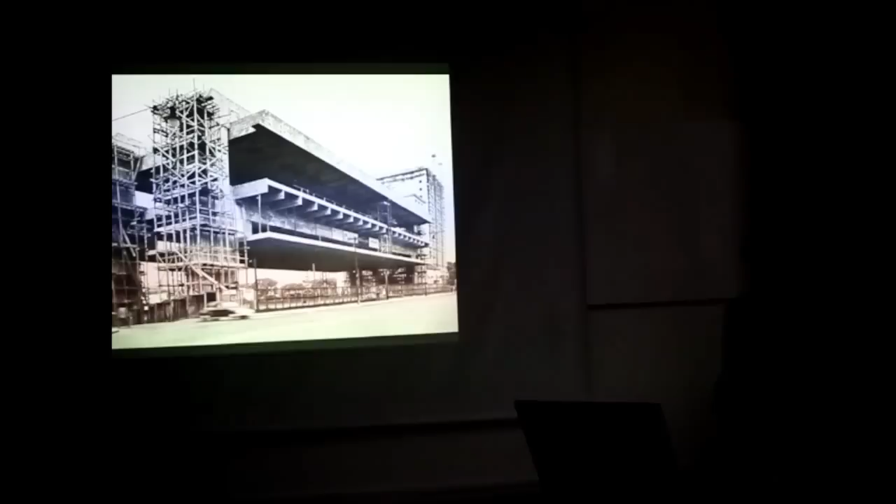And maybe one of the reference points - we think a lot about structure and how structure and space are absolutely interconnected. In a sense, this image is very much to do with defying gravity, with having a sense of mass and at the same time having a sense of defying mass.

Just to talk about themes or qualities we look for in the work we try to make: we don't see much difference between past and present in terms of places and spaces and qualities that move you. We're interested in that sense of mass being borne down or held up, and that human beings enjoy moving in spaces where you feel you're moving within the play of the forces of gravity. This is an undercroft of two bridges that meet in Toulouse, a beautiful conjunction of elements.

One of the projects I'm showing is our project in Toulouse, the Jacobin cloister, where we managed to capture this moment of a child standing in the sunlight, in the spotlight. It was memorable for us in terms of registering the climate and the light, and thinking about how, when you visit a place like this, one can make space through a series of layers — of garden, of cloister, of wall, of window, of volume, of glass, of tempering climate — rather than containing space in an abrupt way.

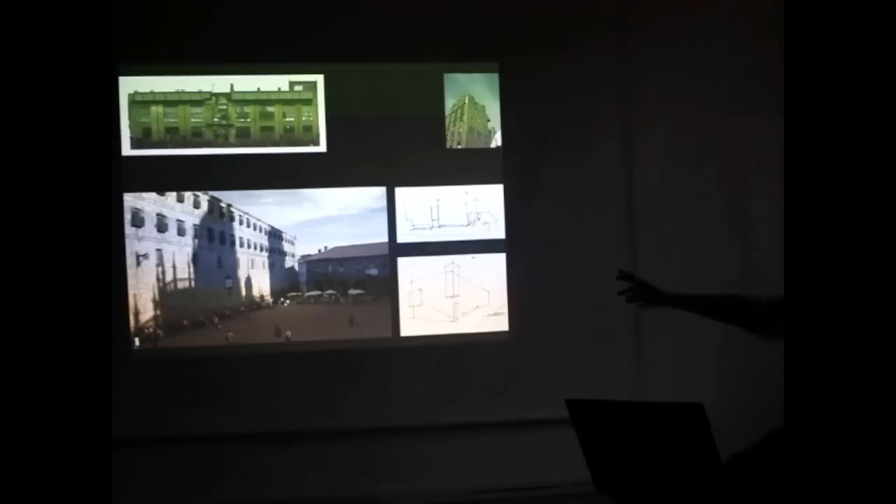One of the things you asked us to talk about was something we never managed to achieve. This is the same wall in Santiago de Compostela, with a big bench and the reflection of the cathedral on its surface — this idea of making a building that would be a secondary element to something more primary and more important than you.

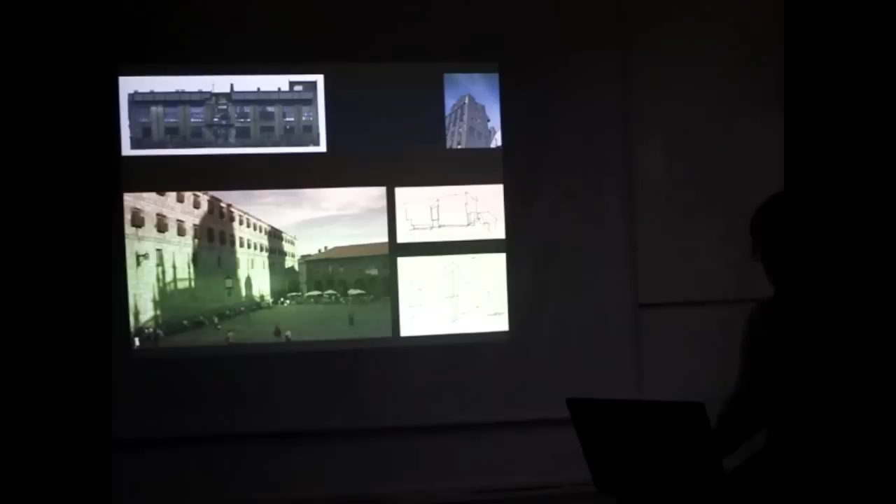When we made the Mackintosh competition entry, this was our aspiration — to make something opposite the Mackintosh building which would be almost nothing, a wall that would reflect in the sunlight, reflecting the form of the Mackintosh building, and would make a seat from which people could view it. We thought that was a beautiful idea, but we made a complete mess and didn't develop it. So that's one of the things you asked — are there things you've never managed to make? That's one. But we're really interested in making something secondary to something already there, something primary to your own project.

This comes back to Oskar Kokoschka, painting from the top floor of a building right beside the Berlin Wall, looking down on a city he hasn't seen since the '20s and is shocked when he returns. He's commissioned to make a painting just after the wall has gone up, and is so shocked to see the scarred city. It comes back to this idea of city and architecture — when you see cities or buildings destroyed, you realize that architecture and buildings and cities hold culture.

When buildings are destroyed, a component of culture is destroyed. This is the city that has made us, or made our practice. We've spent many years working in Dublin, stitching and repairing blocks and working in back lanes, and I suppose without realizing it, following the proposition of Jensen Skodvin, thinking about addition rather than subtraction. This way of building up a practice, where you're literally always repairing something that's already there, has affected the way that we look at ways of making new projects.

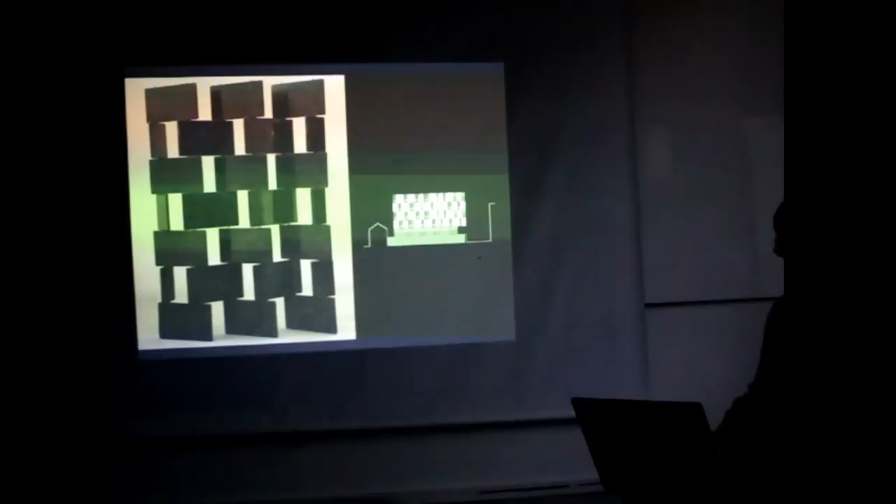Our reference point for this was the Eileen Gray lacquered screen. What we love about that screen is that it's movable. It has weight, but we've always wanted to make a wall which would have that sense of maybe being able to move, even though it might not move, almost dematerializing mass. This was a collage study we started this project with, for the building in Dublin.

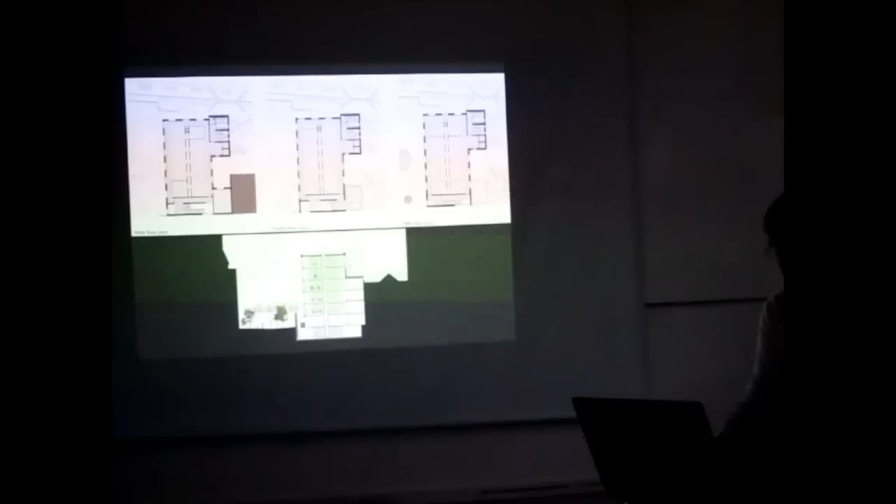The other building we went to see when making this project was this bank building in Stockholm by Celsing. We were really shocked by the enormous strength of this black piece of mountain, which seemed to find itself in the center of Stockholm. It starts off being very rough and becomes more and more refined, absolutely beautifully detailed, and we felt it was like a piece of geology right in the center of the city. We were trying to make a wall which would have that kind of mass.

We made an office building where the circulation is on the edge and people work in the middle, so there was an idea that the city was present, and that the civil servants and the city would always be in contact. We made this cloistered space with the rhythm of window, solid, framing the view of the city, making a vertical weave of stone and glass, like a privacy screen overlooking the cemetery. The recessed windows open and the projecting windows are fixed, so your relationship with the wall and the city changes as you move around the building.

So this project was to do with paying homage to a secret, important place in Dublin, and also making a public building which would have a sense of presence and of mass.

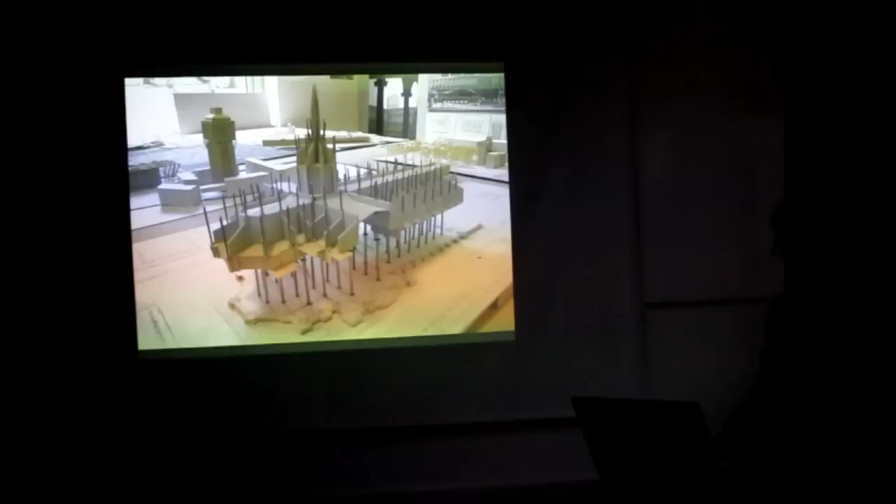We found on the roof of the Duomo a kind of abstracted landscape - like this man-made stone mountain whooshed up in the air. This model was made by Mendrisio students, and we really loved the way it was made, because it somehow described that sense of a man-made landscape floating above the life of the city. Going back to the Sverre Fehn roof and the limestone landscape of the west of Ireland, what we found in Milan was the fantastic floor of the city, and that had a real potency in terms of the way that we thought.

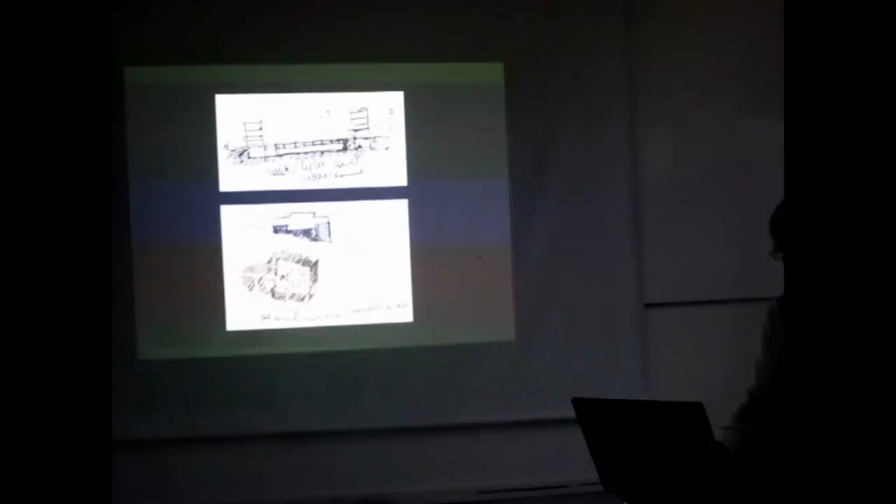And it felt like quite a hard city, quite defensive and hard to penetrate, not open and easy like so many other Italian cities. But yet when you went inside, you found this other secret world of courtyards and aviaries and wonderful delights. And our project was to build 60,000 square meters of building.

But half of it was supposed to be below ground, and we really weren't sure how you could possibly put 30,000 square meters of building below ground.

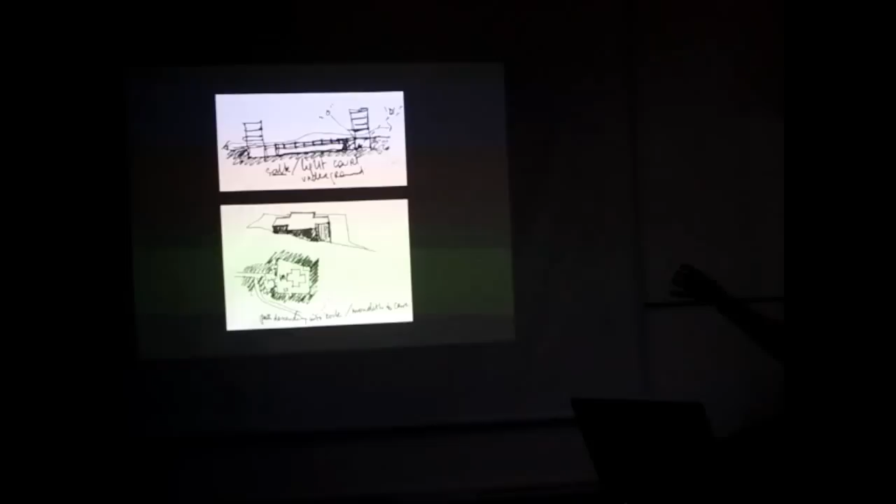And we looked at Lalibela, these wonderful underground churches in Ethiopia, where they're carved into the ground, and there's these fantastic ritualistic routes to get to these buried spaces. But of course we also looked at Kahn and at Salk and how he made spaces below and above ground.

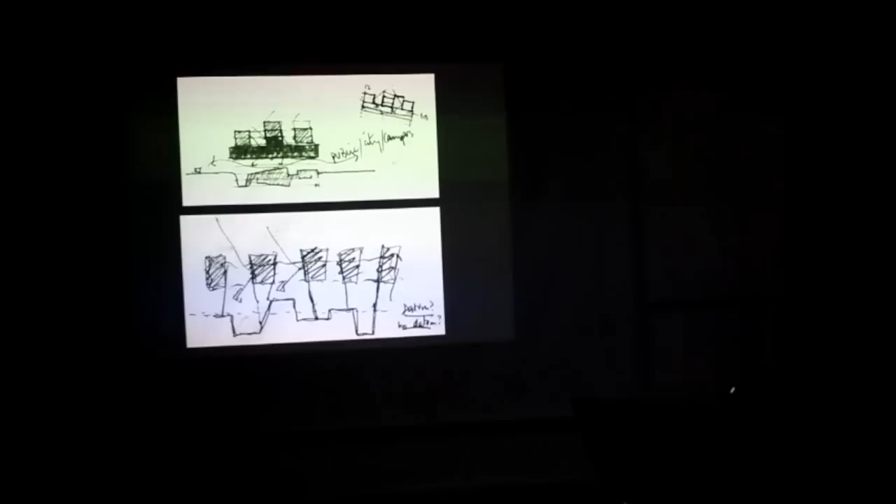And when you talk about key moments in your list of things to think about, this was a key moment for us. You know, when you find sometimes that you've got something that you can make, that you've got a starting point, and the bottom sketch for us was the starting point.

That we could make this university by thinking, first of all, that we would eliminate this idea of boundary between below and above ground, that we would just eliminate this idea of datum, and that we would make two worlds.

One would be the carved ground of the city, which would allow the university to allow the city to enter into the world of the university, and the other would be almost like inhabited soffit louvers, that we would make this skyscape or this roofscape through which light could come.

And we were literally thinking like that because this was huge. We hadn't a clue what to do. It was more than 10 times bigger than anything we'd ever done before, and we had to do it in 3 months or something. So you hit the ground kind of running.

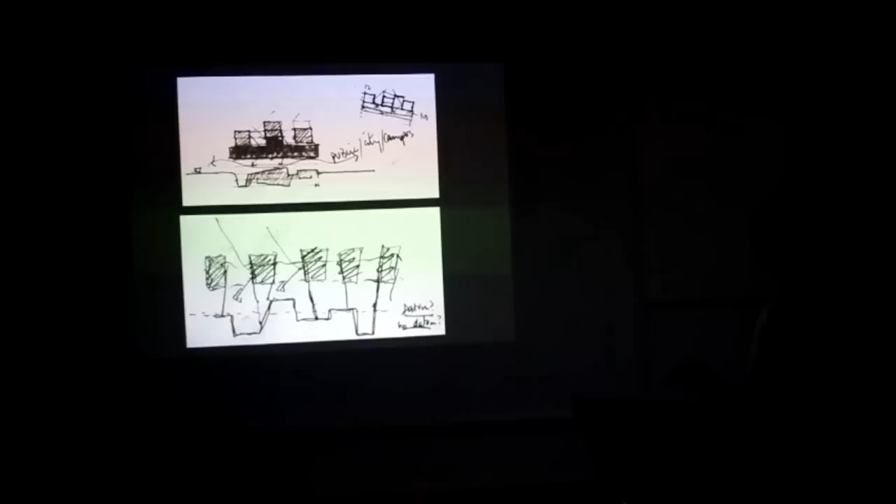And so we thought about carved landscape, and we thought about a light filter which would allow the offices of the professors to exist, the conference facilities below ground, and that somehow by holding these two worlds apart, the life of the city would enter into the life of the university.

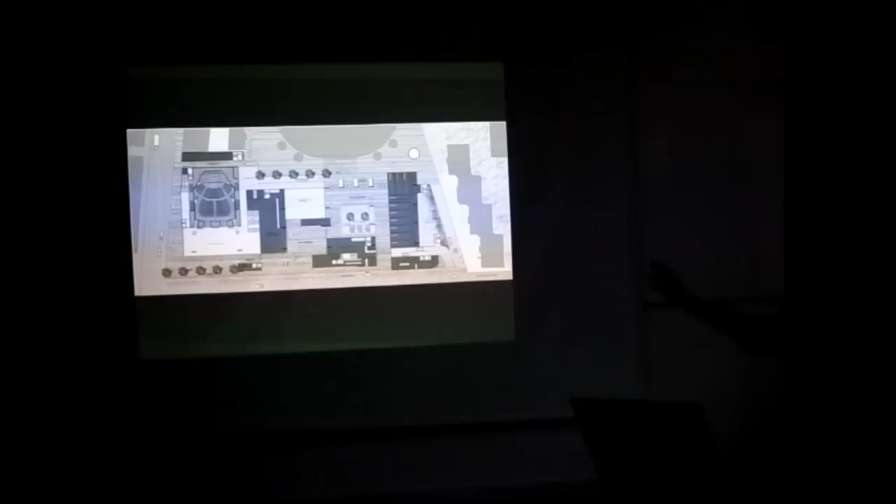I'm not going to go through it in detail, but just to say that the stone floor of Milano is taken through the building to try to bring the city through into the project, and these are our very early models of really struggling, trying to see how we could convert this idea into a project.

This thing of trying to find a scale or a rhythm. And it goes back to Lina Bo Bardi and Vilanova Artigas, this work which we actually discovered just before we were invited to do this competition.

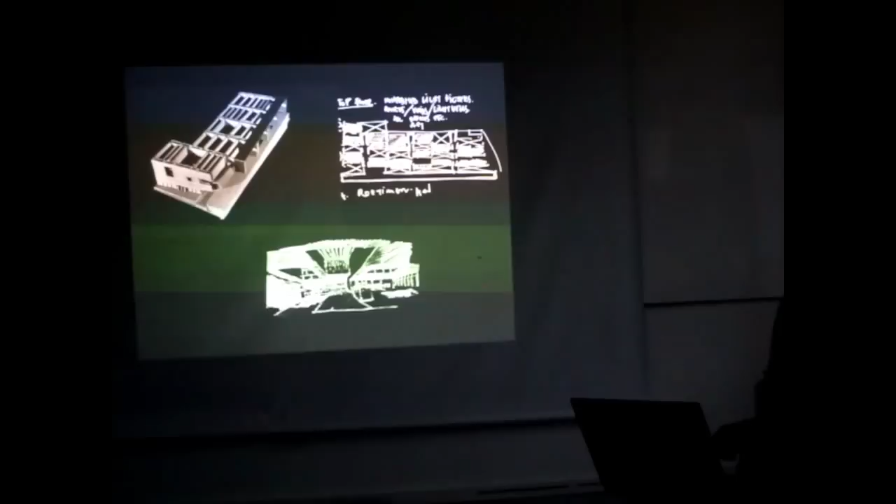And there's an infrastructural component in that work which really liberated us. So we thought about this not as a building but a piece of urban infrastructure, almost like a piece of engineering that one could inhabit. And the idea of holding these two worlds apart, being able to manipulate the soffit of one and the roof of the other, meant we would make this rich world between the two.

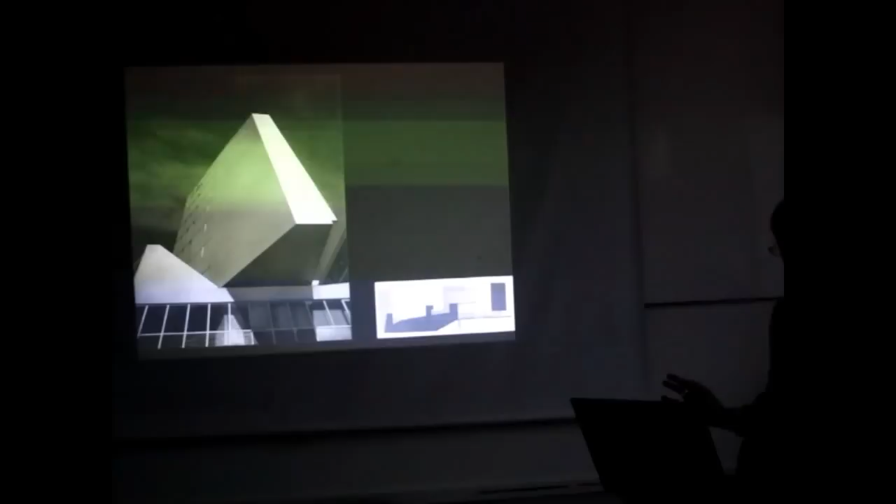When it came to thinking about what kind of building we would make in Milano, we had the highly rational tradition of Pagano and Muzio already on the Bocconi site, and we were torn between that and the more expressive elemental work of Moretti. And nearby on Corso Italia was this project, which really gave us the nerve.

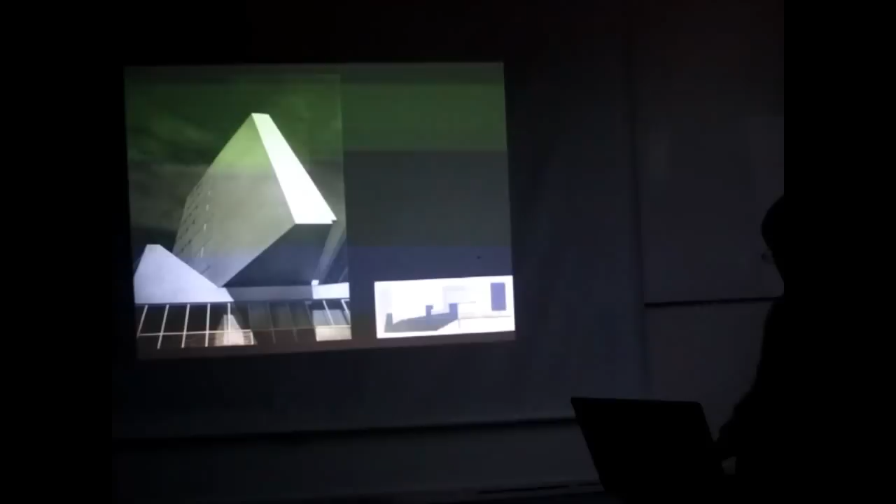And to the bottom right is a very crude collage of ours where we were trying to make the section into the expression of the project.

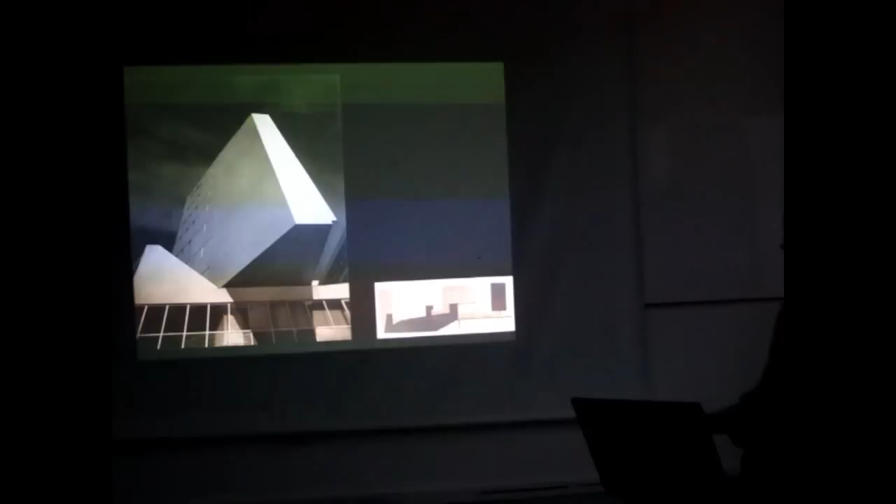And this came after a very long struggle of trying to see whether we should cloak this section of the auditorium, stitching it up into the office space, or whether we should let the project out of the box in a sense. And we let it out of the box.

I suppose we took the idea of the auditorium as the anchor for the project, and thought about it as erupting out of the ground of the city and drawing the life of the city down into the depths of the ground.

And we also thought about this auditorium stitching up into the world of the professors to make these periscopes which would light this large conference space for 1,000 people.

And the structure, which is the infrastructure, is actually the primary circulation spaces, where we have the corridors at a frequency of 25 meters, and they support beams which allow us to hang the offices.

And we had won the competition maybe about 2 weeks, and the client said, "What kind of stone do you want to use?" And we thought, "Oh my God, we haven't a clue." But we did see this lovely stone on Via Brera, and they said, "But that's really ordinary, cheap stone."

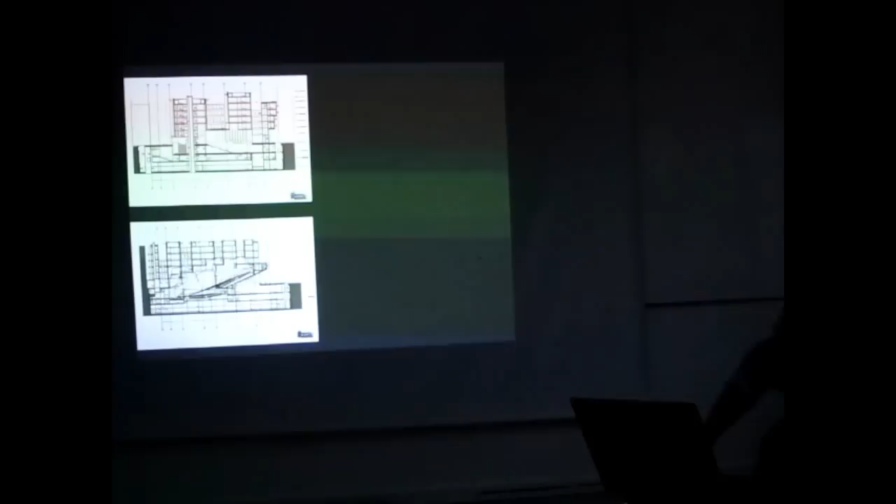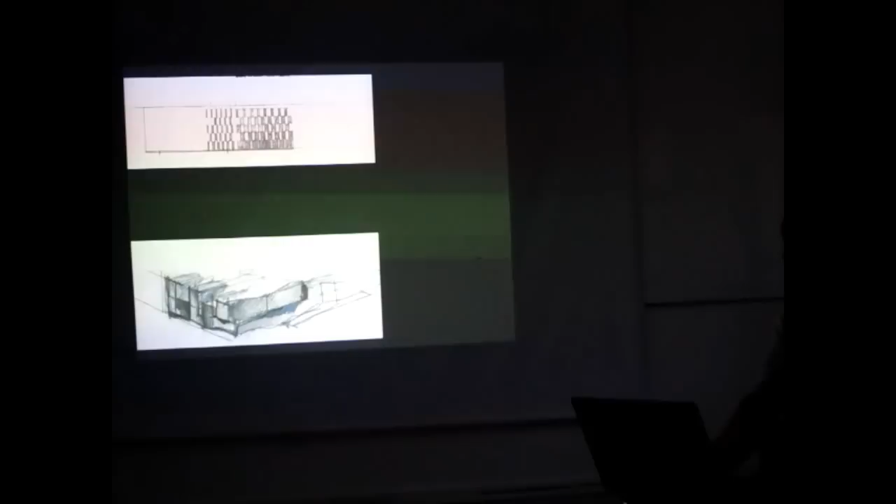And all the time moving between sketches and working drawings. The bottom sketch is about trying to get the sense of Milano, of the hard exterior, and the upper sketch was the idea of trying to make a much lighter, open interior, so that we would keep the contrast between the world of the city and the world of the interior courtyards. And the way that Ceppo is used in Milano is the way that we used it on this building.

Where it's fixed directly to the concrete, and so the joints are tiny, and it has this monolithic quality. And Yvonne called the stone geological concrete, because it feels like concrete. And actually a lot of people, when it was opened first, thought it was made of concrete. And it was a fantastic material to use.

And I suppose, again, the making of architecture, we often talk about it being a combination of precise judgments and random judgments. Sometimes you're asked very quickly to make a decision, and maybe in the way that Eliot talks about the poet needing to be a medium for poetry, architects need to develop our senses, so that when we have to make decisions, our senses are finely tuned and we can make the right judgments.

Approaching Bocconi from one side, we're always amazed that it's almost not there. It's like a kind of mirage. And then when you approach it from the other side, it for sure is there, and makes this corner and represents the presence of Bocconi University to the city.

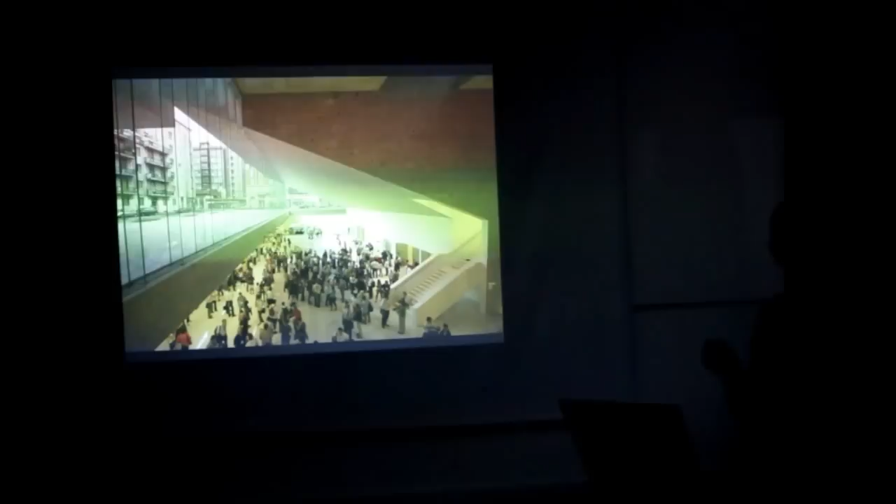And I suppose in terms of this thing of structure and space and architecture, that sense of which is ancient, of that sense as in the bridges in Toulouse, you get a sense of timelessness when you're walking under certain structures, where you feel the structure, you feel a certain connection with the world and with the earth. That relationship of structure and architecture is so primal, and there's a kind of primal component and potential in that connection between structure and space.

And again, this is an obvious reference to Lina Bo Bardi, of weight being borne up and suspended above you, and the cutting into the ground to make large-scale staircases, or the hanging of staircases in space, which is the professor's staircase, which has a different idea, and then the different moods of buildings, which is always a pleasure to watch, where it's being used as a place of celebration and a piece of social infrastructure, or where it's a place to stand alone.

One of the things we found about this strategic way of thinking was that one of the surprises was the diagonal sense.

I was just looking at the fantastic exhibition of photographs you have today, and how wonderful Katsura is, where so much has to do with the diagonal. We found this fantastic discovery of diagonal spaces in section, because the spaces aren't composed—they're the result of a strategic way of thinking, and also how light can be drawn down deep, 5 meters below ground and 9 meters below ground.

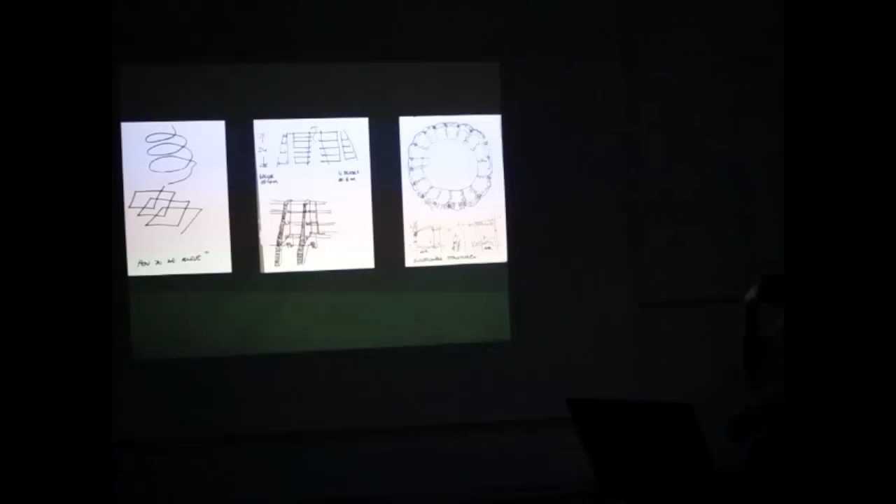Yvonne was making sketches of the buttresses in Toulouse, and we were trying to think, well, could we make a building out of buttresses?

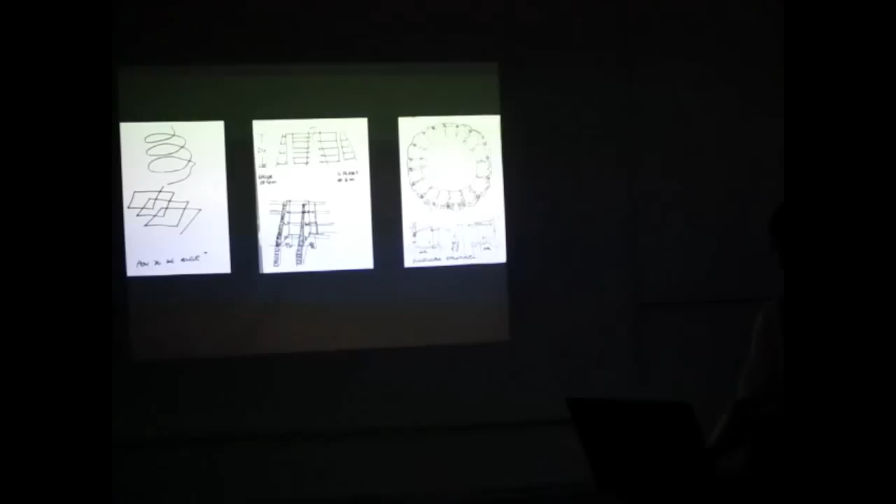I really thought she'd lost it when she started drawing the sunflowers, which were all over the place between Carcassonne and Toulouse. Sometimes you think your partner is maybe not such a great partner, but when she starts going on about sunflowers, I just think, oh God, this is going to be tough. But anyway, that's where it started.

We started with this idea, top left, of making something really solid because it's so hot, and the clients kept saying, we want a building that's cool, we can't work, we're economists, and we have to think. One of the projects we were looking at was Castel del Monte, a fantastic building in Puglia, and just making a solid wall.

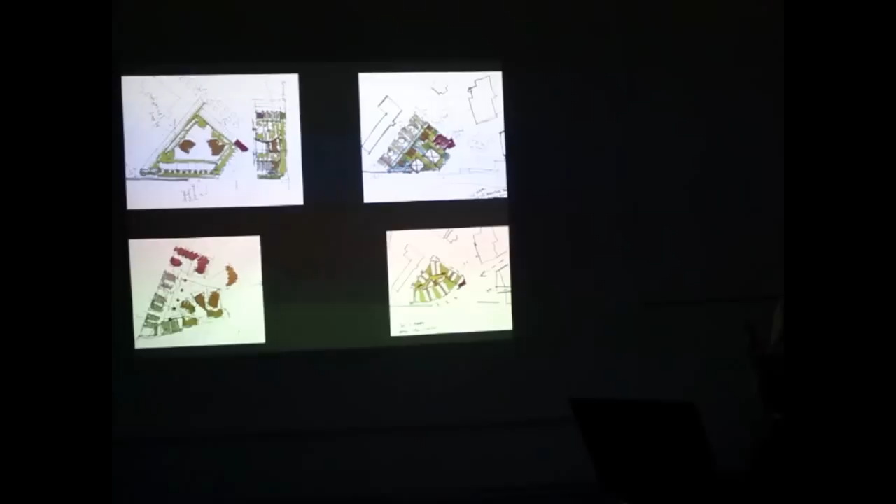But we realized, educationally and in terms of the nature of the city, the university was looking for something much more open and loose. So the top right-hand image—we knew we'd never win the competition because it was so stiff, tight, and rigid.

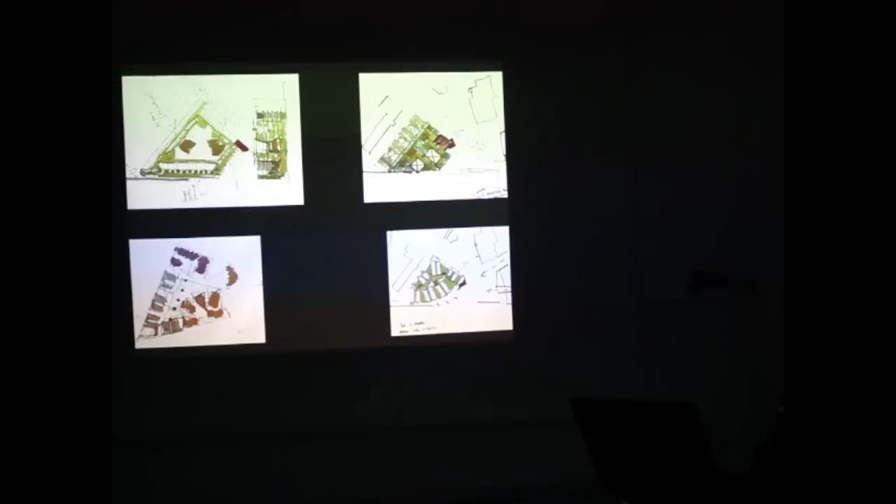We started getting somewhere on the bottom right image because the university wanted a loose arrangement of spaces, and the bottom left we started getting somewhere. But effectively what we found was that the city was like a gravitational pull on the project - we had to make something which would open up to the city.

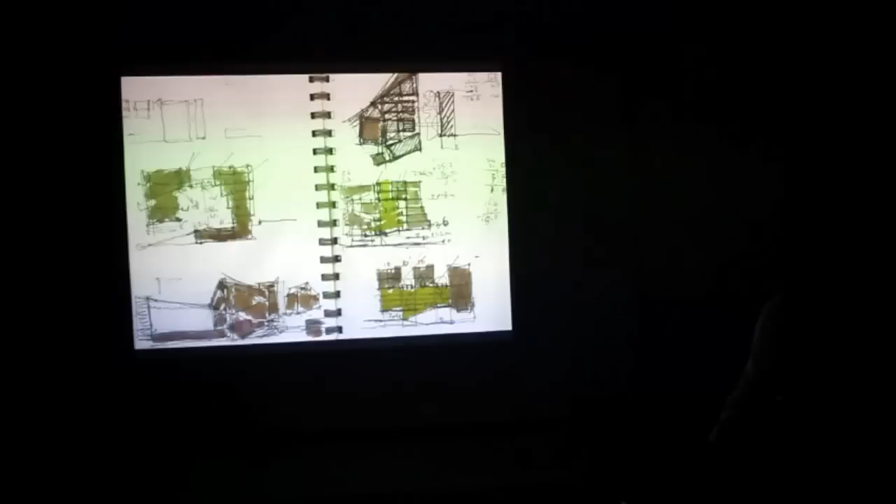So we had this idea about stacking the orange rooms, which are all the common conference rooms, that we would stack those vertically. We're also situated beside a medieval wall, right smack bang on a medieval wall, so we had to think about this.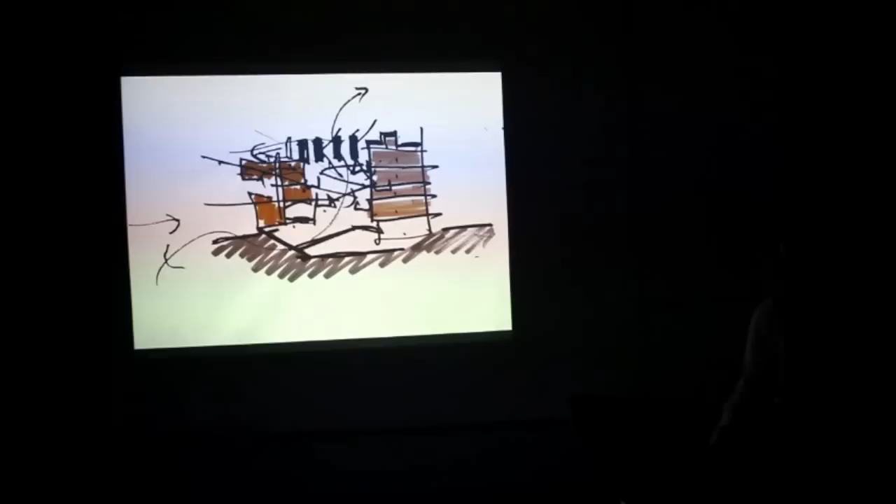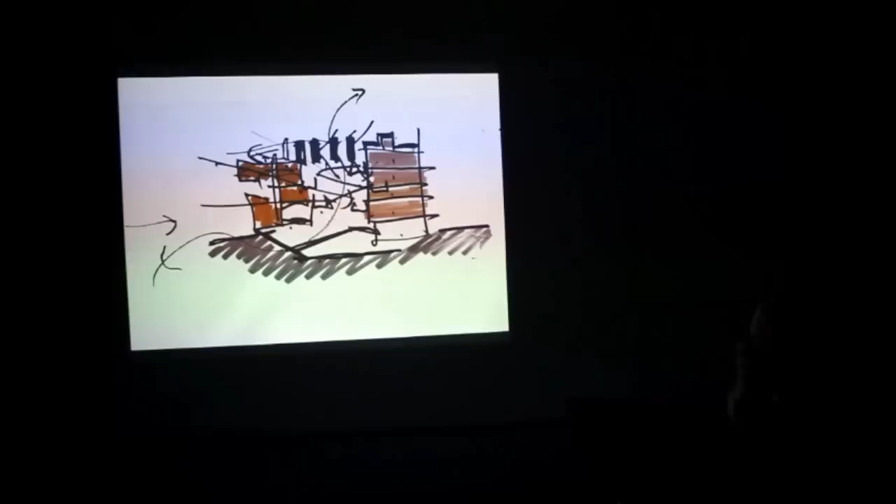I suppose the key moment was this sketch when we thought about stacking the orange common rooms to relate to the river and to the canal, and that we would prize those rooms apart and make big windows at the scale of the city through which the professors could view Toulouse.

We couldn't translate this section into a plan, and we had real difficulty in doing this, and we found that the buttresses really helped us, the buttresses of Toulouse.

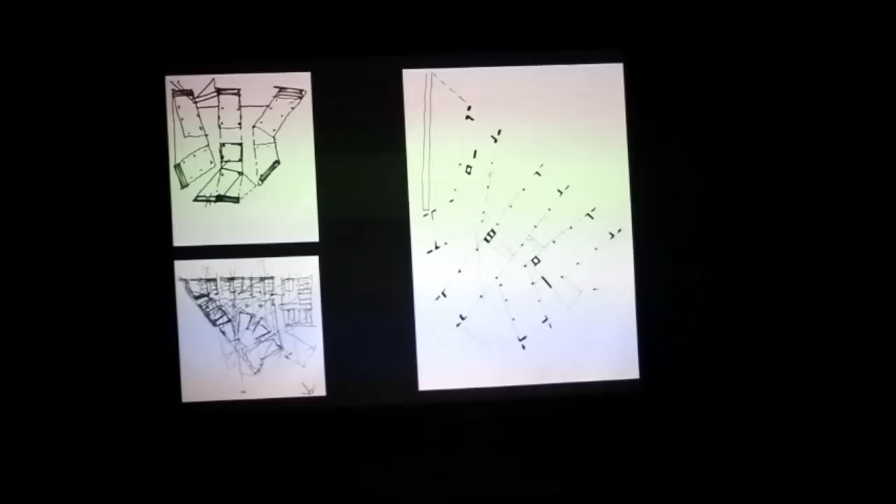So we thought about, in the top left plan, making 6 buttresses, which would make the nostrils of the building, that all the air and the vertical ducts would be housed in those buttresses, and also all the escape stairs.

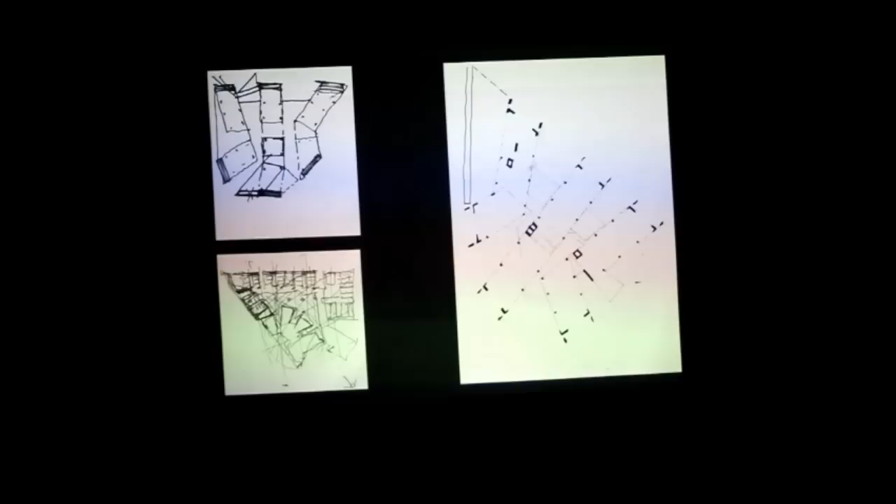So it's like we had to stake out the territory in a way which is maybe similar to the way that buildings traditionally stake out territory in Toulouse. It also gave us a way of establishing mass and establishing edges, and then being able to carve and let the life of the city and the university flow freely between these, what we call buttresses.

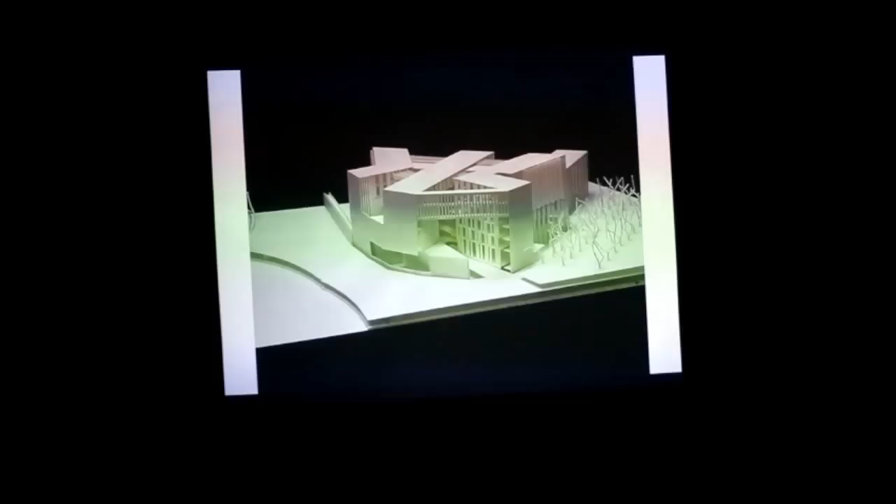And that led to this study model, where again we set up these 6 legs, which are the order of the project, and then allowed the space of the city. I suppose we thought about the building inhaling and exhaling, that it was kind of breathing in and breathing out, that there would be that reciprocal connection between the university and the city.

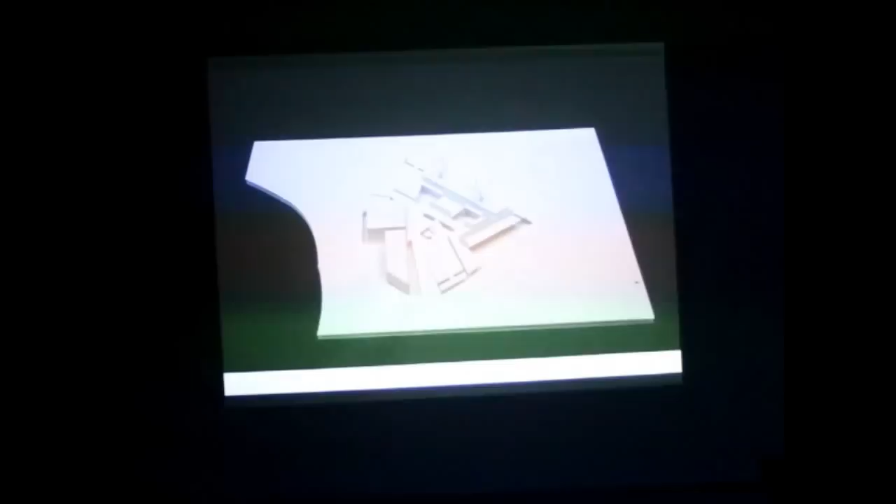Because it's a centralized plan, there's this fantastic column which you couldn't put your arms around, Saint-Étienne, a wonderful space where there are all these - because it's a conglomerate of different spaces built at different periods - we felt that this big column was the anchor. So we made the staircase and lift as the anchor to this building, where the spaces rotate and spin and act as a kind of a pinwheel.

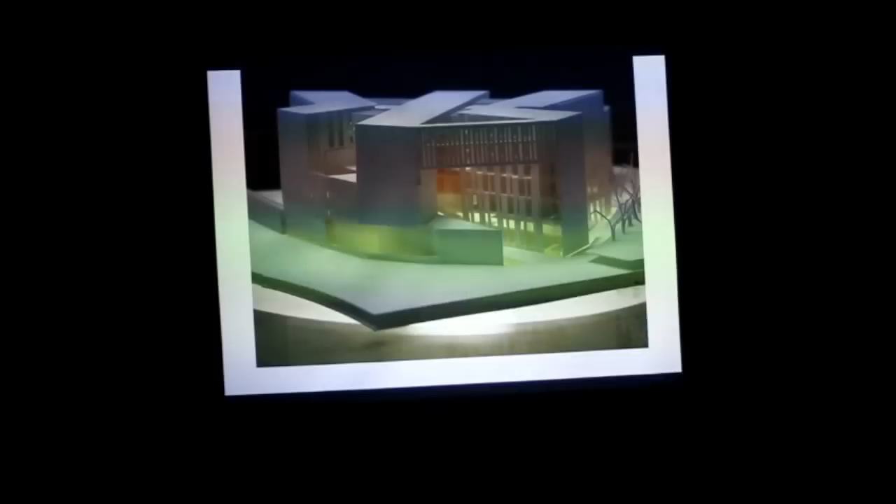In terms of its connection with the city - what you're looking at is the forecourt space where we made this what we call a sky cloister, which connects the professor's, the president's office to the professor's meeting room and lounge.

Even though it's not a hierarchical structure, we have this idea about connecting across the space, connecting down through fire staircases, making these cloisters, maybe connecting up again, so that behind these buttresses there's a secret world of connection which is both utilitarian but also architectural.

This sky cloister meant that we could make the space which frames the sky, like the courtyards that we had visited, where the main elevation would be that thing of the trapping of the sky. So that makes the threshold space between the city and the interior world of the university.

So on the one hand you could say it's a collage of elements that we found, but on the other hand it's a very rigorous, rational kind of brief where we had to deal with highly repetitive elements of offices and special rooms which were the conference rooms.

Our neighbour is this Romanesque brick, solid, fantastic wall. And I suppose again, when you're working in a place, you feel a need to make something that feels like it's connected, but also feels that it's...

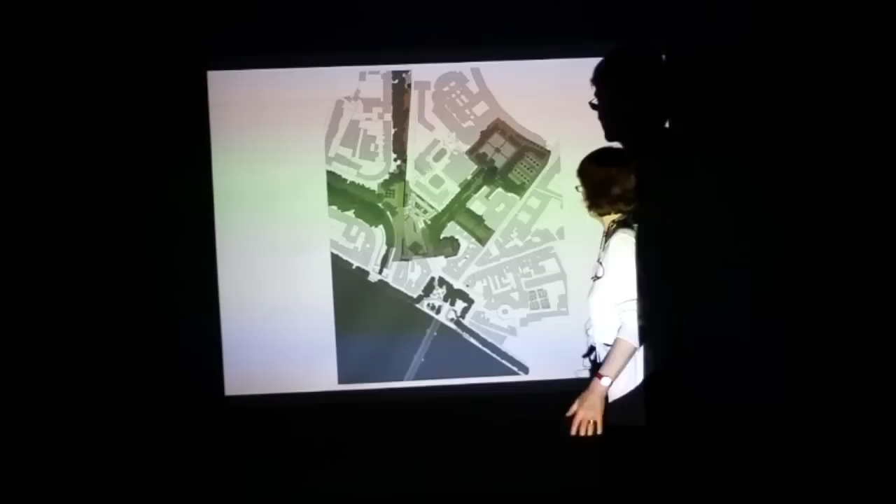The site is at the prow of the university, where the Brienne Canal, this is a branch of the Midi Canal, meets the Garonne River, which is a fantastic, huge river. And this is our site, which is a really difficult shape.

There's a break in the medieval wall, which is no joke, to take your place beside a brick medieval wall 5 meters high, and really not knowing how to address that.

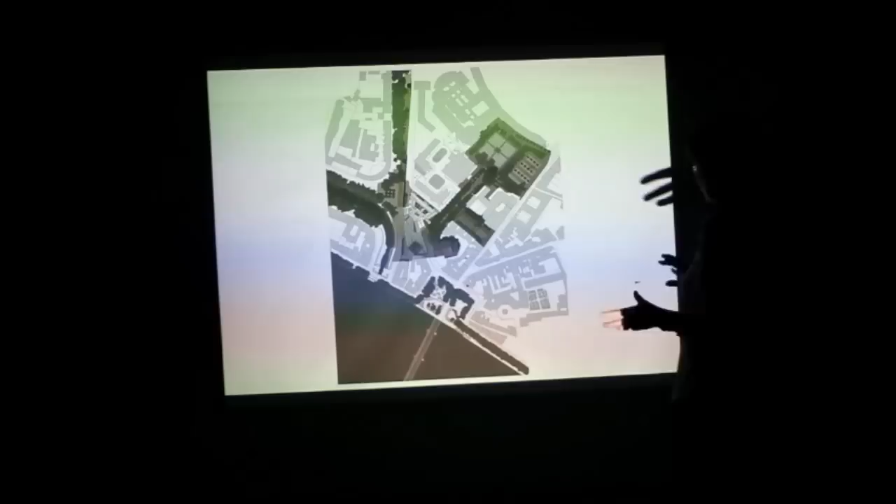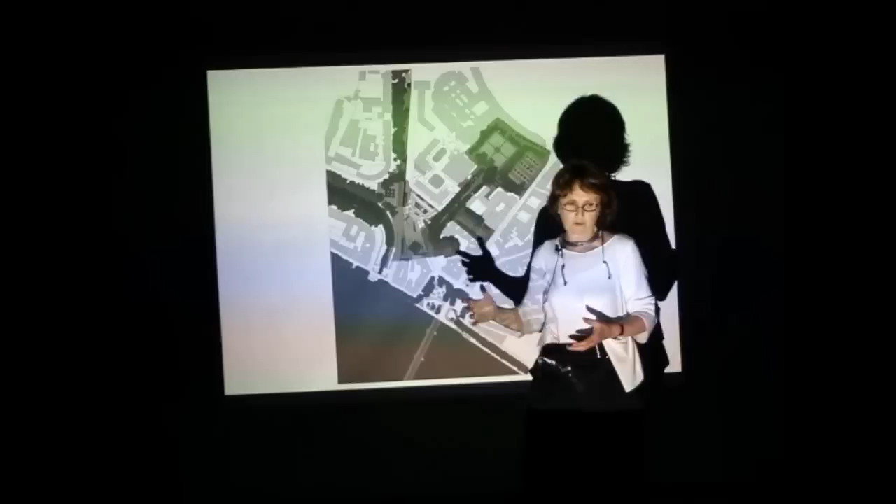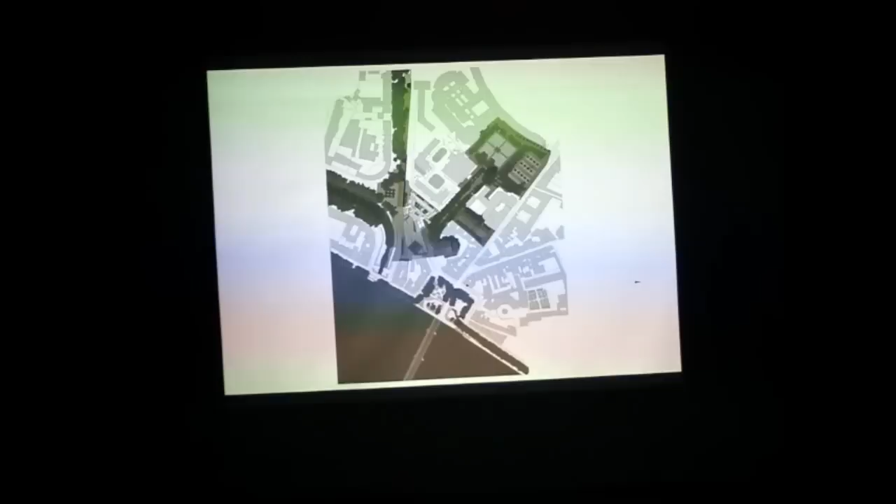Going back to Santiago de Compostela, this idea of background and foreground - we pushed as much accommodation as we could to the background, so that we could make something which would feel more comfortable in the foreground. Sometimes that's relevant and sometimes not, but it was particularly relevant here, this idea of thinking about some components as background and some as foreground.

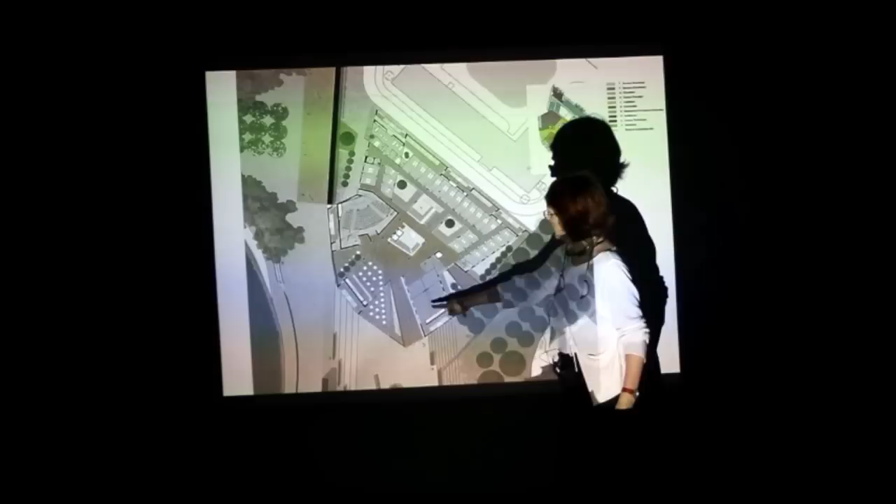So you see the central courtyard space. This is where the sky cloister happens. These are the buttresses, full of services, full of staircases, working not just architecturally but in terms of how the building functions.

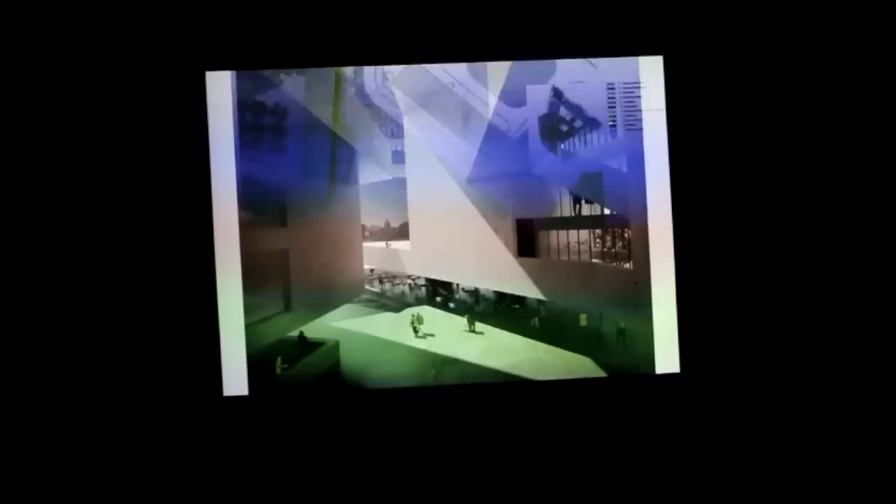Placing the conference rooms, cafes - all these conference rooms are stacked, and between them we make terraces used for amenity, but they also make a big window to the city, so that professors moving around their offices can always view through these windows, where we prized the public rooms apart to make these openings. Because we pulled all the escape stairs to the edge, we can move very freely in this central courtyard space.

Their central foyer space is external, and that was one of the things we loved about Toulouse - so many staircases we walked through where you come through a gate, protected from wind and rain, but you're still outside. That moment of between, where you open a door into a tempered room, is delayed, and we've taken advantage of that climate to do that here.

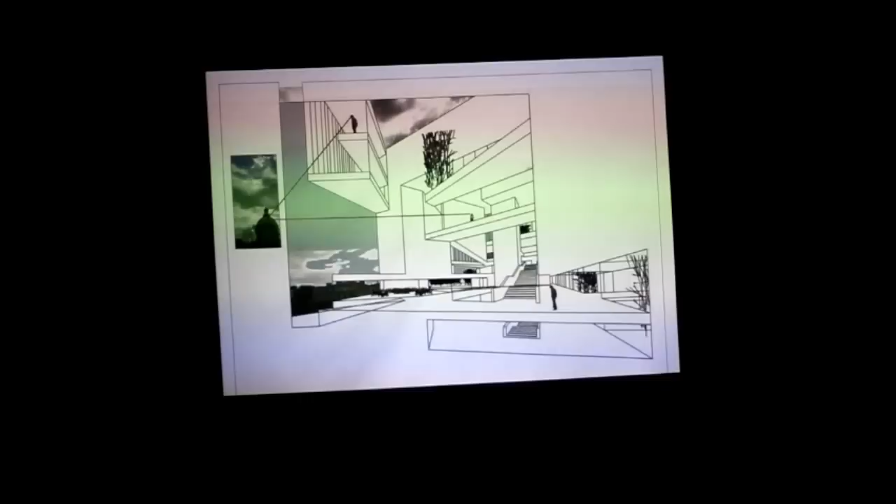I think this drawing describes this idea of an interior landscape connecting with an external landscape, where we're trying to draw the strata of the interior world the same way you might draw the contours of a landscape. This section is through the threshold space, which is a gentle ramp.

The sky cloister encloses this forecourt, and you come into this foyer space, which is outside but controlled in terms of wind and rain. From there you circulate to the research offices.

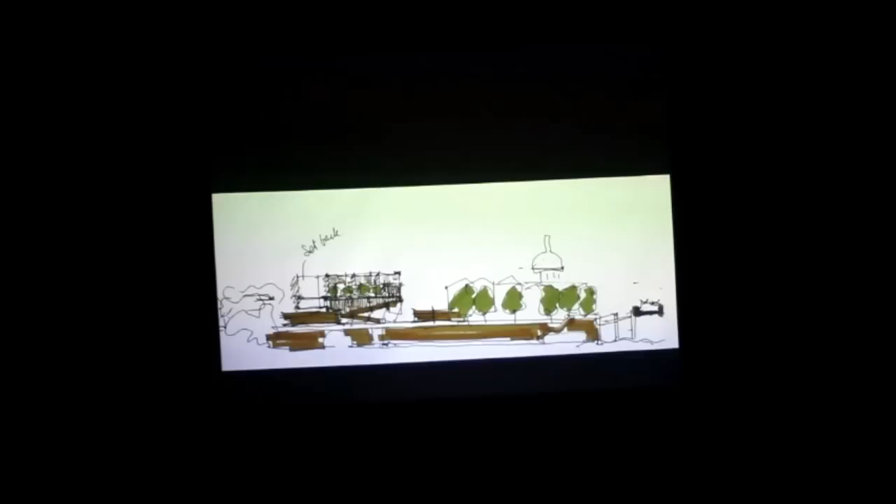In terms of how the building sits in the landscape of the city, Toulouse has all these strata - the river, huge brick walls supporting the streets and boulevards, then the walls of the churches and the skyline. These are early sketches of how we could occupy that skyline, and we used this tourist postcard as part of our competition entry to test how our buildings might sit into the landscape of the city.

Going back to Manuel de Sola Morales, he talks about looking at a city and not making any difference between the centimetre and the kilometre. I love that you can focus on something really small which can inform a big decision, or vice versa.

Here we've been looking at brick for months. On the left is the medieval wall, which has been repaired and re-repaired, and the walls of Toulouse, and how they retain these boulevards hovering over this big river.

One hour outside of Toulouse we discovered this brick factory, where they tell us they make bricks exactly the same as in Roman times and exactly the same size - 42 centimetres by 28 centimetres, either 40 or 50 millimeters high. But you can also get any shape of brick you want. It was like going to a brick bakery.

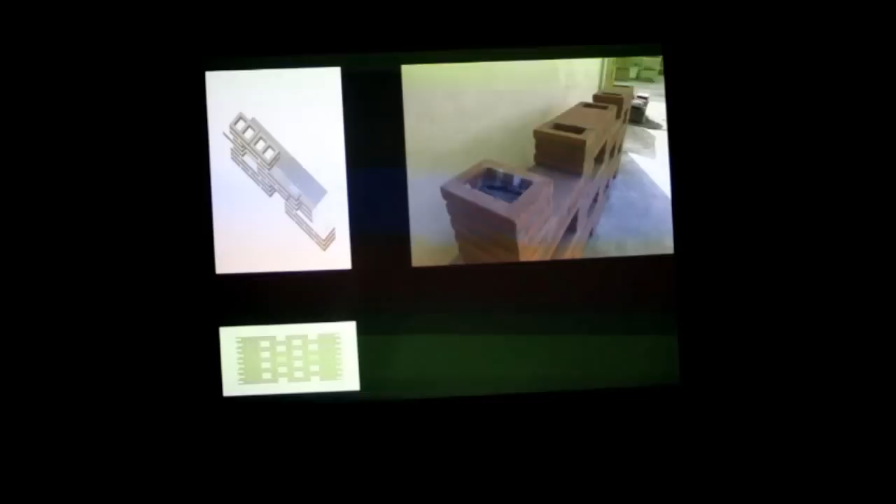We're mixing traditional and contemporary engineering, because all those fire escape walls I mentioned, those buttress walls, have to work in terms of smoke extract. So we've pulled the bricks apart to allow adequate ventilation and extraction of smoke, working within all the strict French regulations and codes of practice.

So we use their donut bricks, with secret reinforcement inside them to make these aerated walls. And we're using the same color pointing and texture as the medieval wall.

We had a lot of arguments about how our buildings should touch the ground. When we went back and looked at Albi, which Louis Kahn also looked at, as well as Toulouse - if you look again at that film My Architect, I could see Albi in Louis Kahn's buildings. This is an amazing fortified church in Albi, a piece of engineering and architecture, but it sits in such an uncompromising way, so solid on the ground, that we really worked to give our building in Toulouse that sense of presence.

I'm just going to finish with a competition we've just won in Lima, Peru, and I'm not going to show it in any comprehensive way.

We discovered the work of Vilanova Artigas in about the year 2000, and that really helped us in making the project in Milan. I don't think we would have done the competition in Peru if we weren't already familiar with this work, which is in Brazil, but it's the same continent, and we made this kind of connection in terms of that tradition. What I find so stunning about this project is that it's engineering and landscape and architecture all mixed up. Somehow Vilanova Artigas can make a house feel like a piece of infrastructure, and a piece of infrastructure feel like a house. There's something amazing about that.

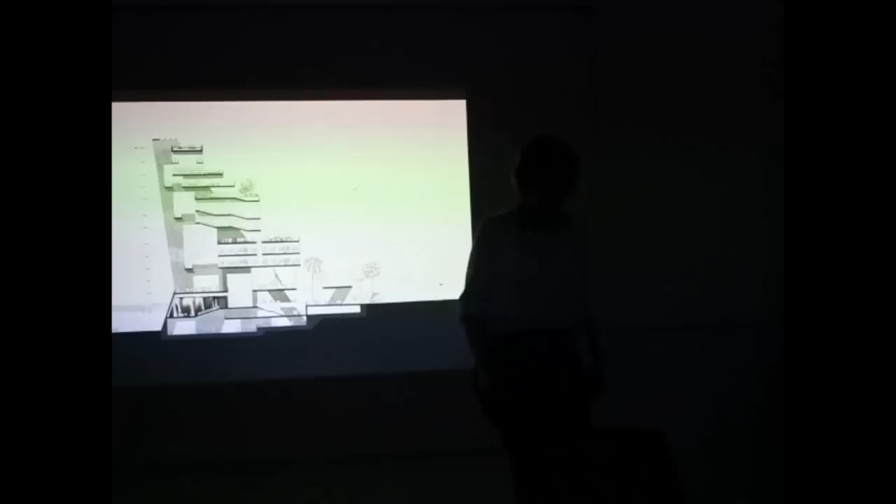I suppose because of the nature of the site, we were thinking about a university in a very particular way. So we made this project where the idea was to have on one side these stepped terraces at roughly the scale of Barranco — it's almost as if we peeled Barranco up and carved out the undercroft to make this big space at the scale of the city, from which the students would have a visual connection with the city, not a physical one, because of the motorway. We would ground the project with the conference facilities, making this heavy groundwork, and out of that would come a structure that has to work from a seismic point of view.

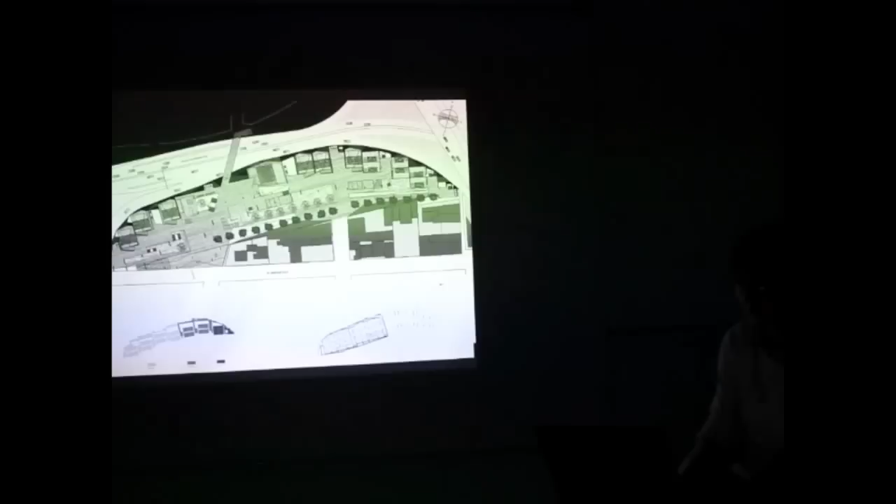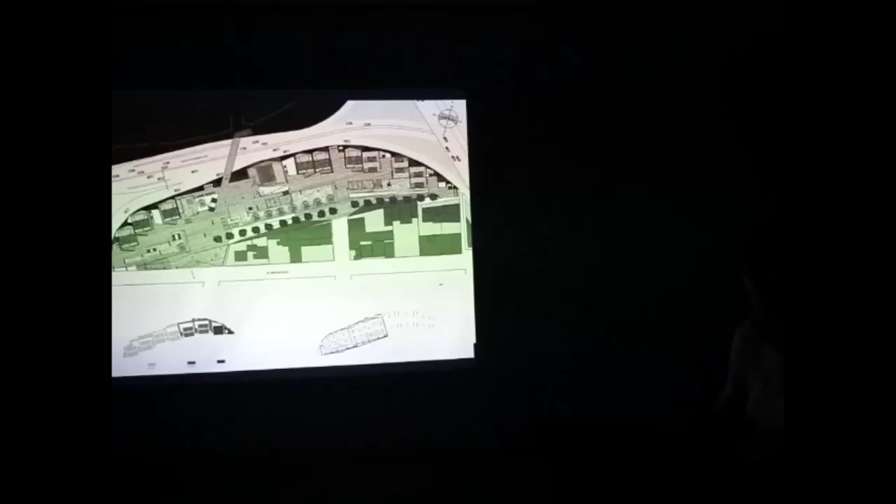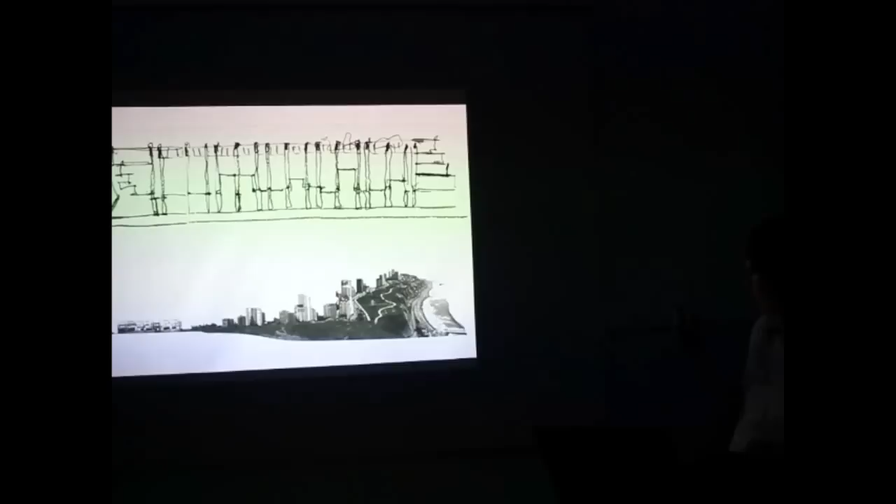Just looking at the plans with the motorway to the top of the page and the residential quarter to the bottom of the page—not unlike Milano in some ways in terms of thinking about structure and strategy, but with a very different set of conditions here, in terms of those two extremes of motorway on one side, and this is our project in the context of the scale of the city.

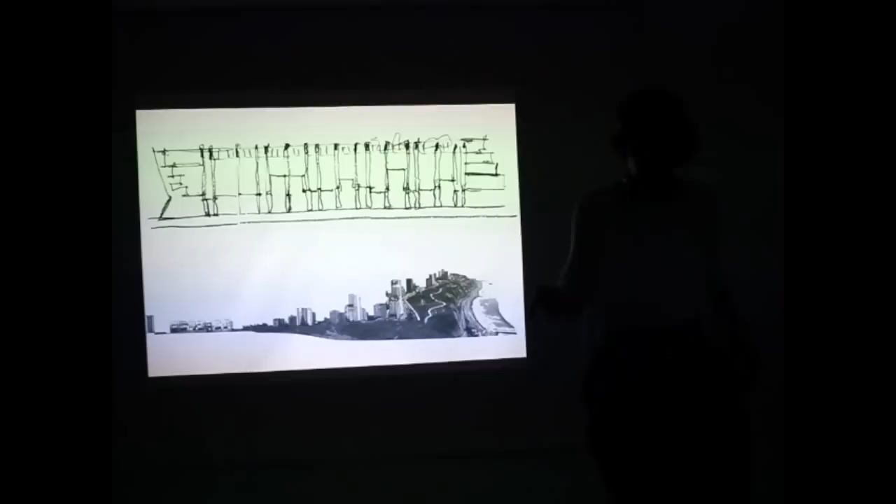It's 280 meters long. It connects down this valley to the sea. As I say, we wanted to make the public space overlooking the city, and then the learning spaces more intimate, relating to the residential quarter.

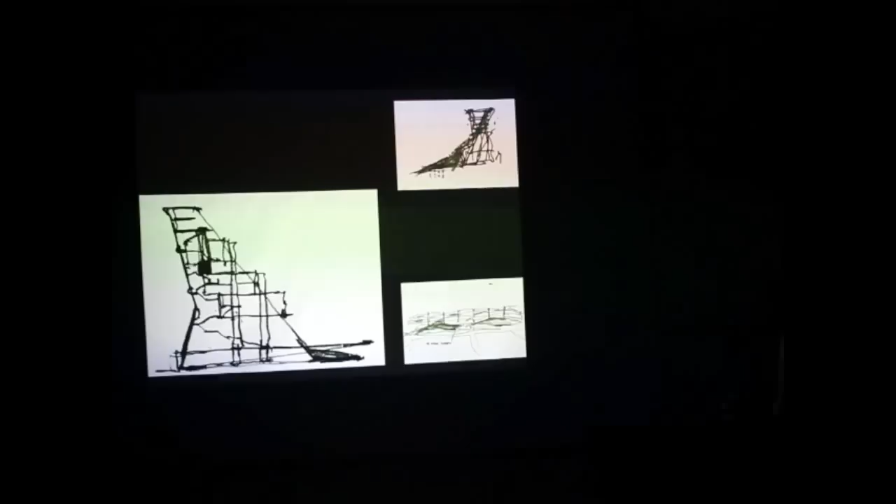There's also the thing of water—in Lima they have 9 millimeters of water a year, so there's a huge problem. These sketches were to do with trying to trap water when they have these floods, which they call El Nino, but also designing the whole structure and bracing in such a way that water collection tanks and water holding tanks would be integrated into the structural bracing system, and into the whole idea of really making a new landscape.

There are these structures—we haven't managed to go and see them yet—but they're amazing in Lima, where these sacred places are man-made burial places, man-made ground and strata and terraces made from the earth. And because it was foggy, there was this idea that the building would merge with the sky.

It would rise from the ground, being really solid towards the motorway, and rise up and merge with the sky, and connect with the color of the earth, as so many of the buildings in Lima do. We would use the concrete, the aggregate or mix in the concrete, to in some way connect with this idea of the cliff.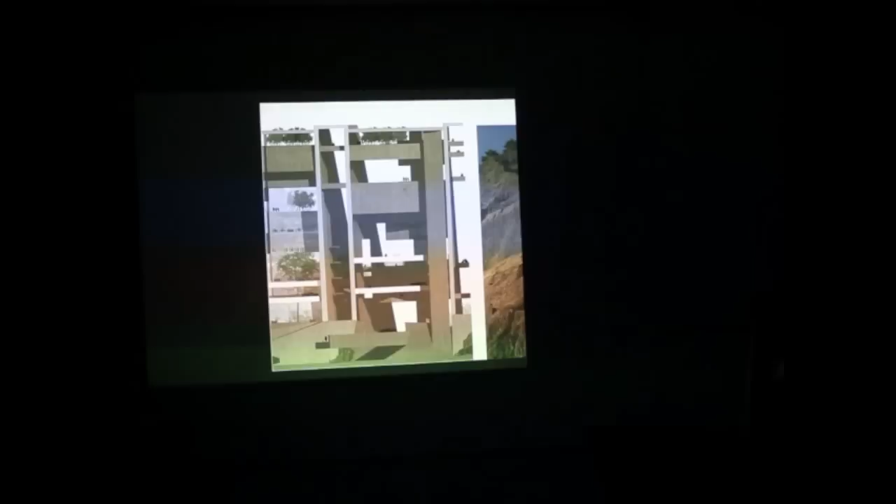In the way that Vilanova Artigas's work somehow allows landscape to flow—and Mendes da Rocha, we've been looking recently at his football stadium, and it's amazing how tiny cracks in the structure allow a landscape to develop. So there's this kind of humanizing thing of landscape, integration of landscape and structure.

And the gardens which the students would enjoy, which relate to the teaching spaces and also overlook the city, but would make a quieter, more contemplative zone.

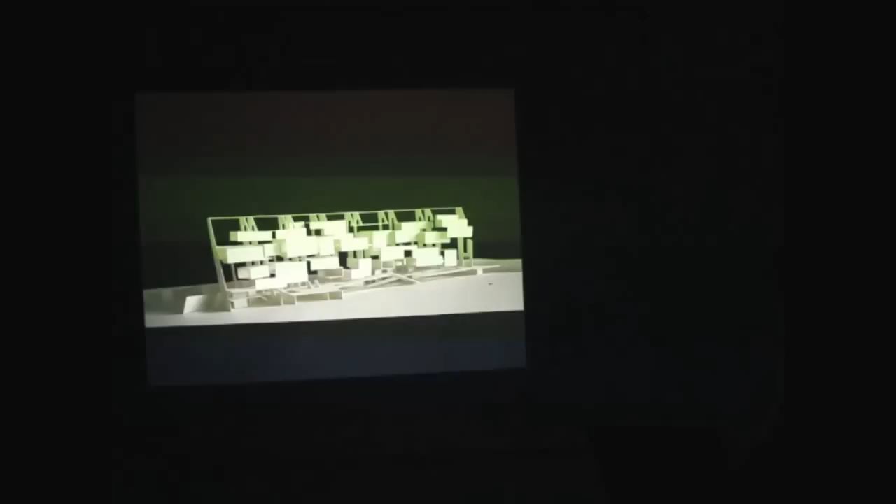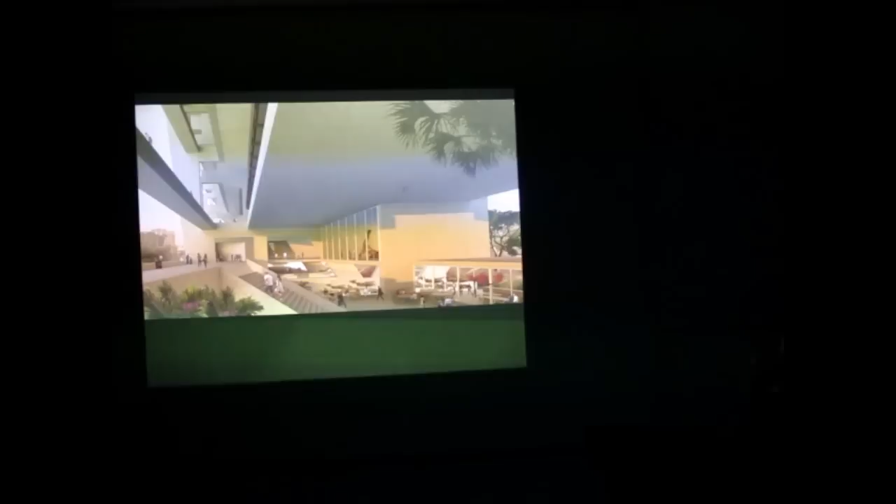Looking at our sketch model, this thing of making these kind of artificial, man-made terraces which are hung from this large-scale structure, making a really perfect space which would be conducive to urban life and also to the life of the students—really trying to learn from, or think about, those Villanueva images and the warmth of the light, and how we could use that thing of climate to make very open, easy spaces.

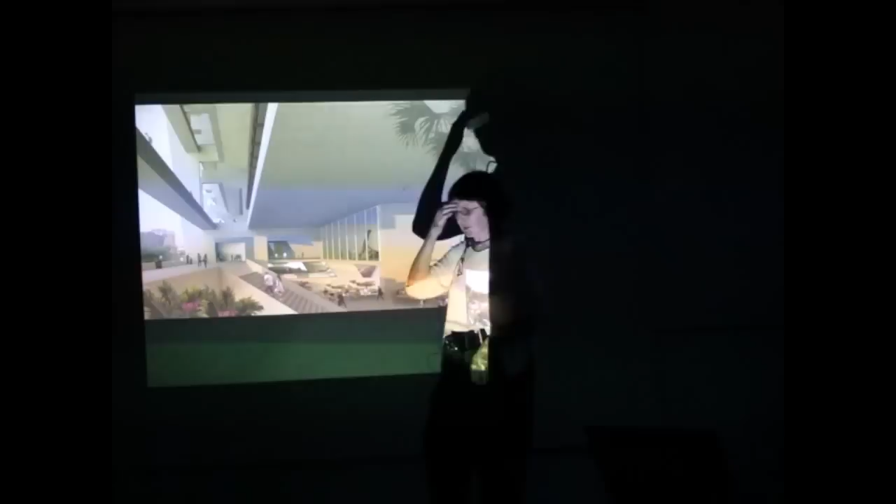One of the things the client really loved was that it's an engineering school, and the most important element for them are these big, tough, dirty laboratories. We just felt they should be the heart of the project and part of its social life—almost like exhibition spaces—and that everybody, like in Toulouse, moves to the buttresses to escape.

Everybody moves to the side of the motorway, both to circulate and because there's this huge issue in places like Lima of panic to do with earthquakes as well as fires. So the whole thing of escape and safety is crucially important.